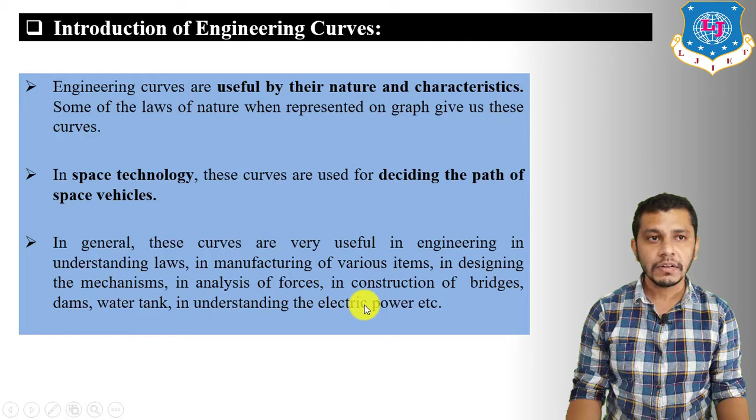In general, these curves are very useful in engineering, in understanding laws, in manufacturing of various items, in designing mechanisms, in analysis of forces, in construction of bridges and dams, in construction of buildings and water tanks, and in understanding electric power, etc. Now let us see the classification of curves.

Curves are classified into conics, spiral, cycloidal curve, involutes, and helix, where conics are further classified into triangle, circle, ellipse, parabola, and hyperbola. Spirals are further classified into Archimedean spiral and logarithmic spiral.

Cycloidal curves are further classified into cycloid, epicycloid, and hypocycloid, where cycloid is further classified into inferior trochoid and superior trochoid. Epicycloid is further classified into inferior epitrochoid and superior epitrochoid, where hypocycloid is further classified into inferior hypotrochoid and superior hypotrochoid.

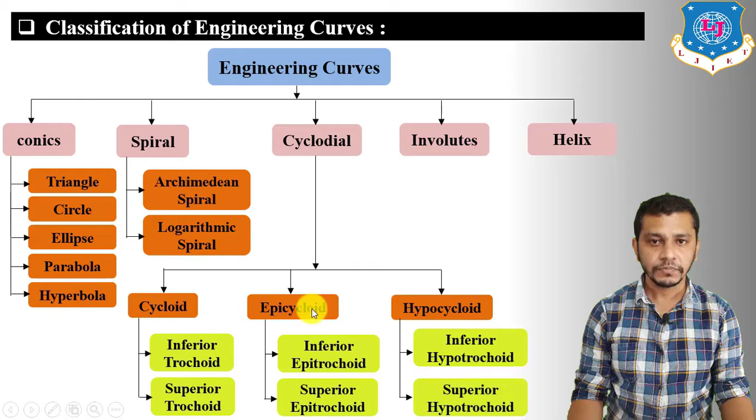Let us see involutes. Involutes are further classified into involutes of circle, involutes of line, and involutes of polygons, where helix doesn't have any further classification.

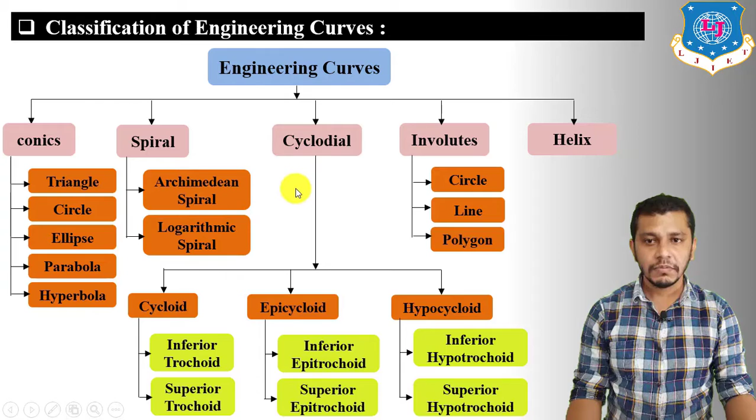So let's move on to conics. First of all, what are conics? In simple words, we can say that conics are the section of the cone. First, let us understand the terminologies of the cone.

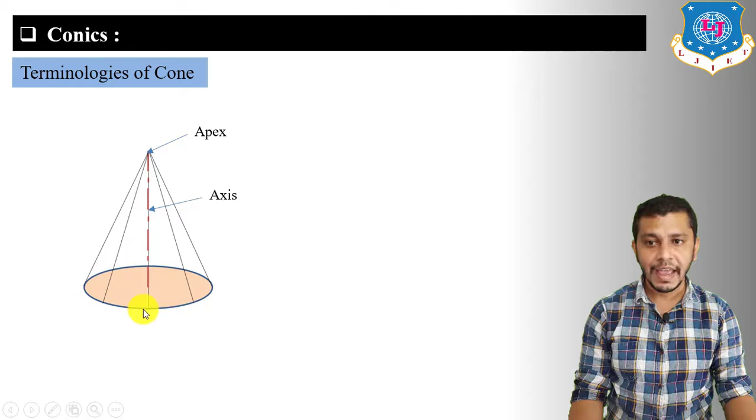Here we have represented a right circular cone. This point of the cone is considered the apex point. Then, the line joining the apex point and the center of the base, an imaginary line, is known as the axis. Generators are also imaginary lines connecting the apex point and the periphery of the base. This will be our base.

Now if you take this angle theta, this is the angle made by the generator with the axis. This angle, which is 2 theta, is known as the aperture angle of the cone, and we can also say that this is the maximum angle between two generators of the cone.

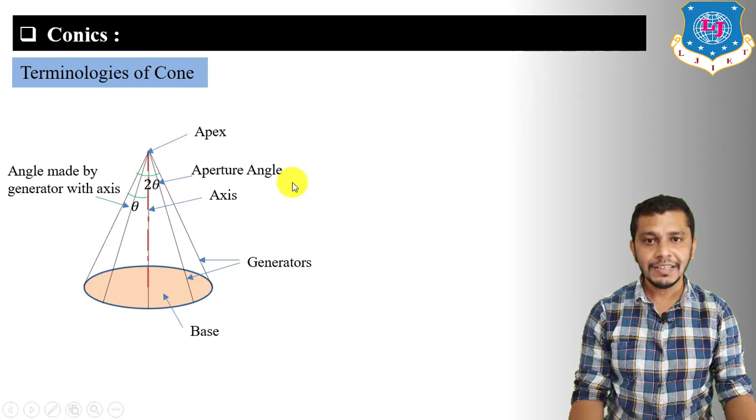If this cone is cut by a cutting plane at different positions with reference to the base and axis of the cone, then the curve of intersection is known as conics, and the different curves of intersection are triangle, circle, ellipse, parabola and hyperbola.

So we can say that triangle, circle, ellipse, parabola, hyperbola are conics. Now let's discuss when we will get a triangle, when we will get a circle, ellipse, parabola, and hyperbola as an intersection of the cone.

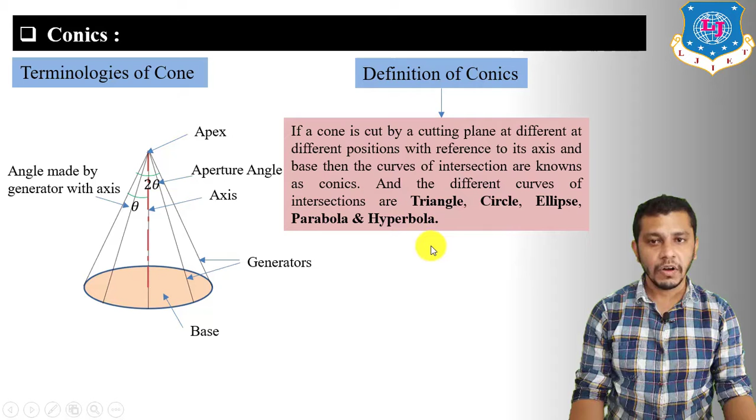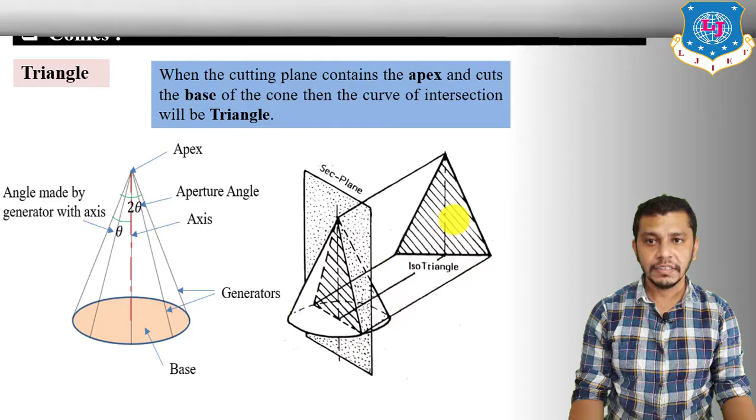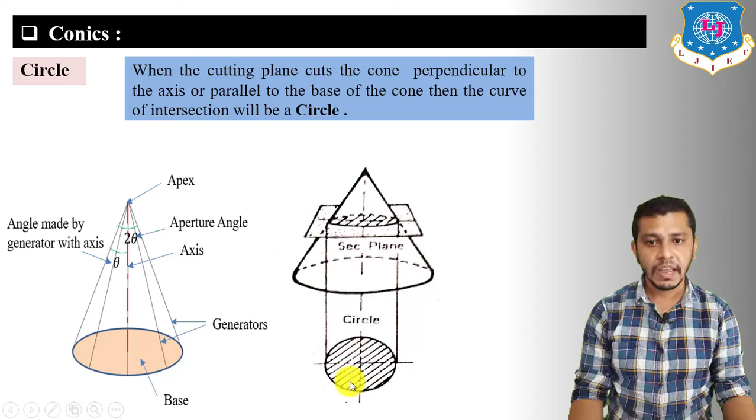We can say it is an isosceles triangle. Now, when will we get a circle as an intersection? If this cone is cut by a cutting plane parallel to its base, or perpendicular to the axis of the cone, then the curve of intersection is a circle. Here the cutting plane is parallel to the base and perpendicular to the axis, so we get the section as a circle.

Now, when will the cutting plane give an intersection as an ellipse? When this cone is cut by a cutting plane inclined to the axis at an angle less than theta, or when a cutting plane is inclined to the axis and cuts all the generators of the cone, then the curve of intersection will be an ellipse. Here it cuts all the generators of the cone, so the curve of intersection is an ellipse.

Or we can say that if the cutting plane is inclined to the axis at an angle less than theta, then the curve of intersection will be an ellipse. Theta is the angle made by the generator with the axis. So, to find an ellipse, the inclination of the cutting plane should be less than theta.

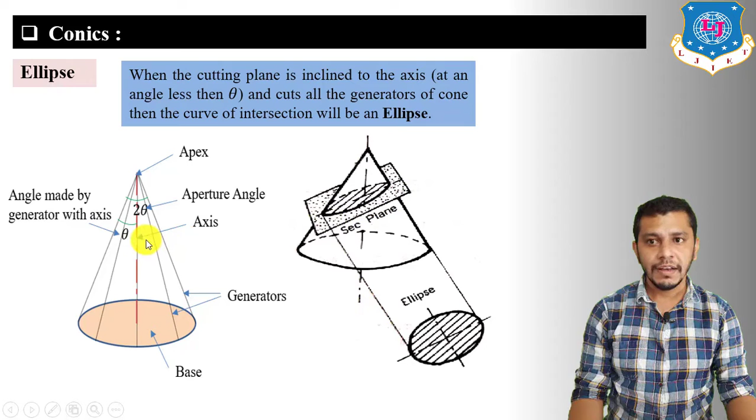Now we will get a parabola as a section when the cutting plane is inclined to the axis at an angle equal to theta, or when the cutting plane is parallel to one of the generators of the cone. Here you can see the cutting plane is parallel to one of the generators, so we get the intersection of the cone as a parabola, with the angle of the cutting plane equal to angle theta.

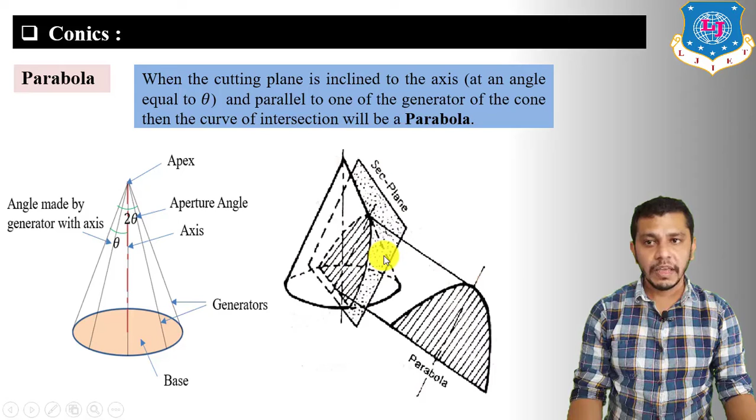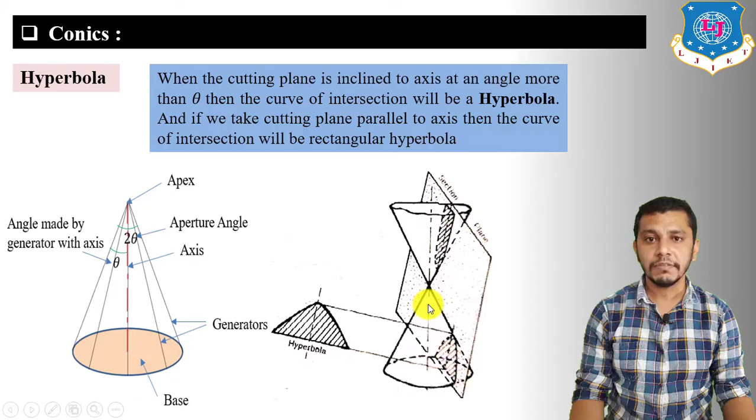We get a hyperbola as an intersection of the cone when the cutting plane is inclined to the axis at an angle greater than theta, so the curve of intersection will be a hyperbola. If we take the cutting plane parallel to the axis of the cone, the curve of intersection is also a hyperbola. So these are the intersections of the cone.

Now let us move on to the definition of the ellipse and its applications. An ellipse is a curve traced out by a point moving in a plane such that the sum of its distances from fixed points remains constant and equal to the major axis. These terms, the fixed points and major axis, will be discussed in upcoming lectures; for now just note the definition.

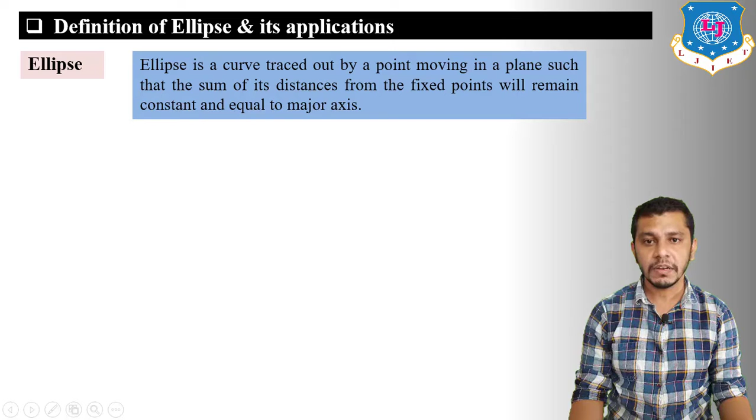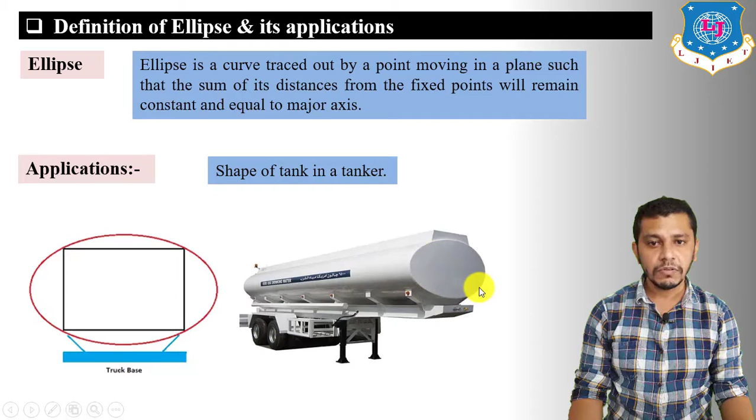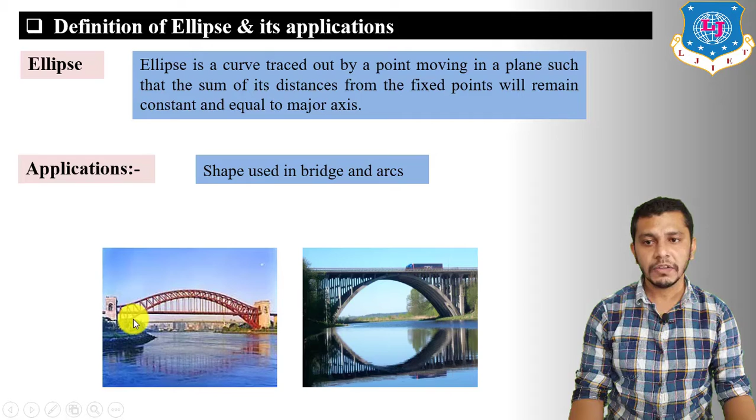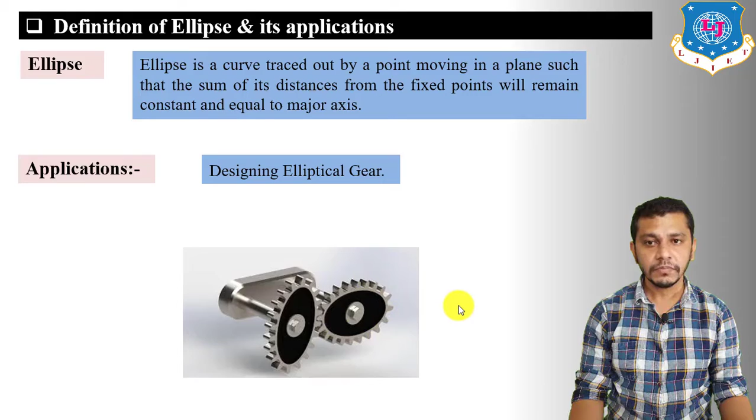It is also used to design elliptical gears, where the tooth profile of the gear is based on elliptical curves. It is also used to define the path of the earth around the sun, which follows an elliptical path.

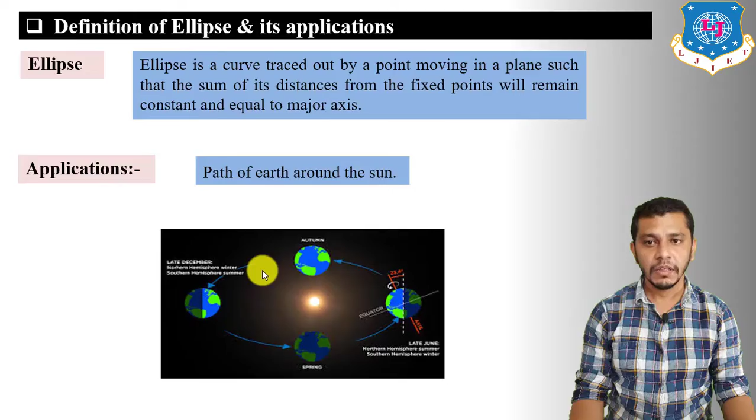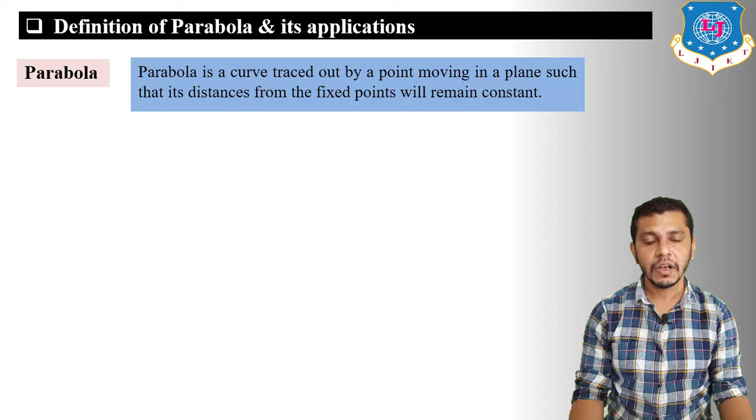Now let's move on to the definition and application of the parabola. A parabola is a curve traced out by a point moving in a plane such that its distance from the fixed point remains constant. Applications include the motor car headlamp reflector, used to design the lamp reflector of a motor car or bike.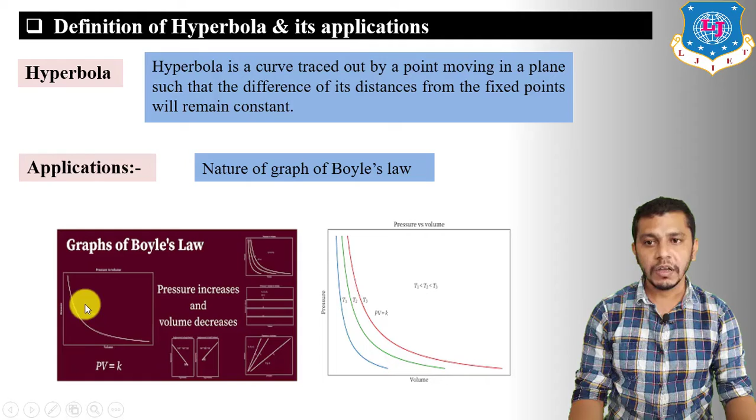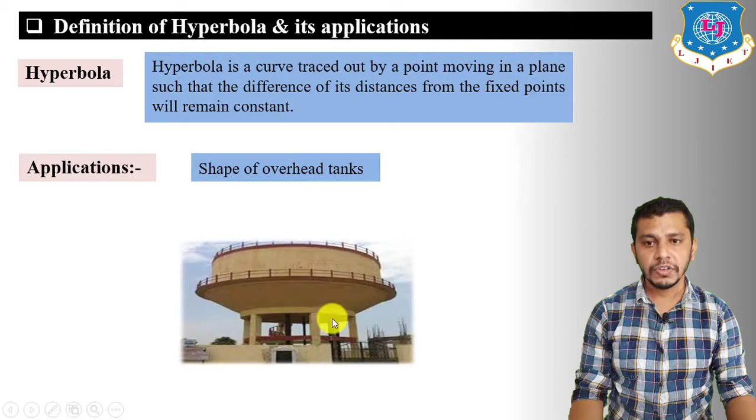Next, hyperbola is also used to define the shape of overhead tanks, as shown here. It is also used to define the shape of cooling towers, as seen in this video.

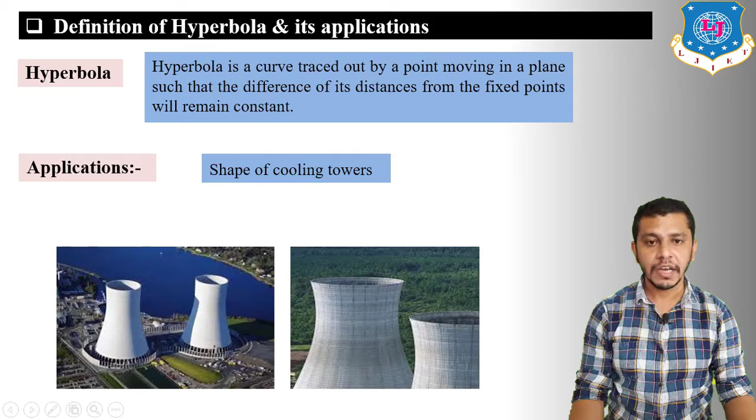We have a total of 5 methods to draw an ellipse: the oblong or rectangle method, ellipse in parallelogram, concentric circle method, arc of circle method, and directrix focus method. Methods to draw the parabola include the rectangle method, parabola in parallelogram, tangent method, and directrix and focus method.

And these are the methods to draw the hyperbola: the rectangular hyperbola method, oblique hyperbola method, hyperbola with foci and vertices method, and hyperbola with directrix and focus method. So this is it for today.